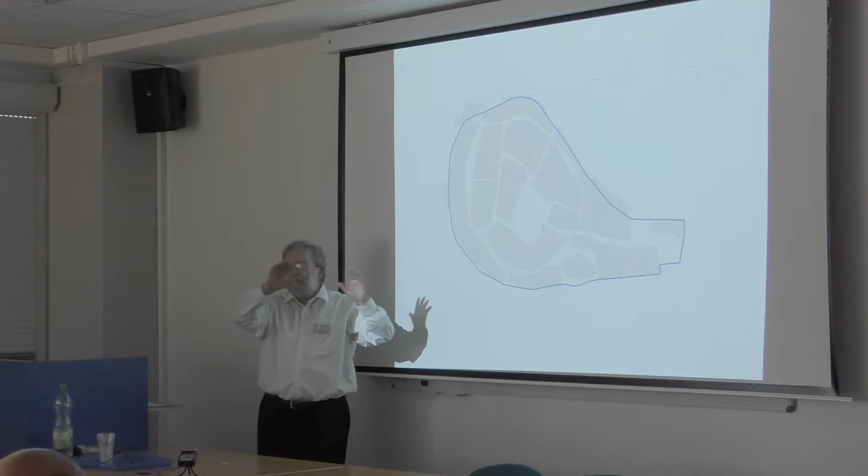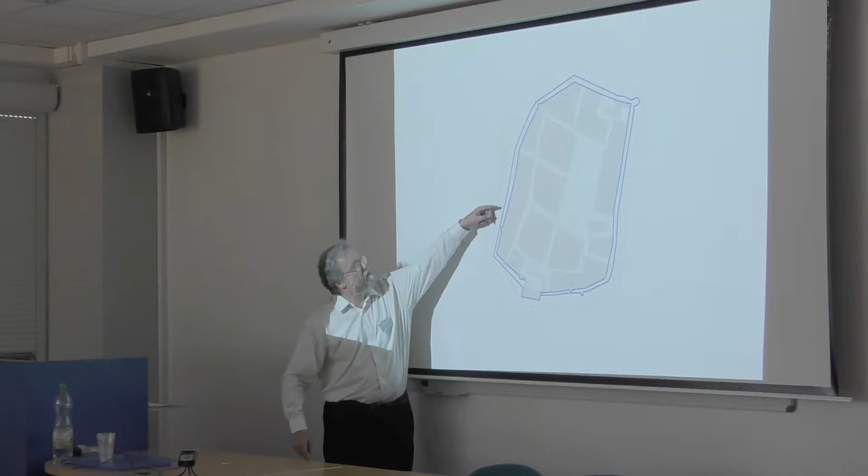We would like to show that in complex cities like Český Krumlov, we know that they were planned, of course they were planned, but the plan follows strict geometrical rules. That's what we would like to show. It's not evident when you see the map of Kadaň; it seemed totally random, totally organic, without any form. But if we look to the plan of Kadaň, we look to the walls, we see that we can find straight segments in the alignment of the walls. And this is for us very interesting.

So I spot out the straight segments. Now I measure the deviation angles from one segment to another, on digital maps. We measured 13 angles, and we see that 2 angles correspond to 7.5 degrees, 4 angles are multiples of 7.5 degrees, you see? 3 angles are multiples of 7.5 degrees plus 1/2, and 4 are multiples of 7.5 degrees plus 1/4 or 3/4.

So I show the full unit angles, half unit, and a fourth. So we mean that the wall was angulated, that the angles of deviation followed recurrent values, that we may consider the angle of 7.5 degrees as a unit; it is the division of 90 degrees by 12. Yes, it's mathematical, but it may be strange. I continue. And we mean that the angles of 1/2, 1/4, 3/4 are subunits of 7.5 degrees. So we say the angle of 7.5 degrees is a rule.

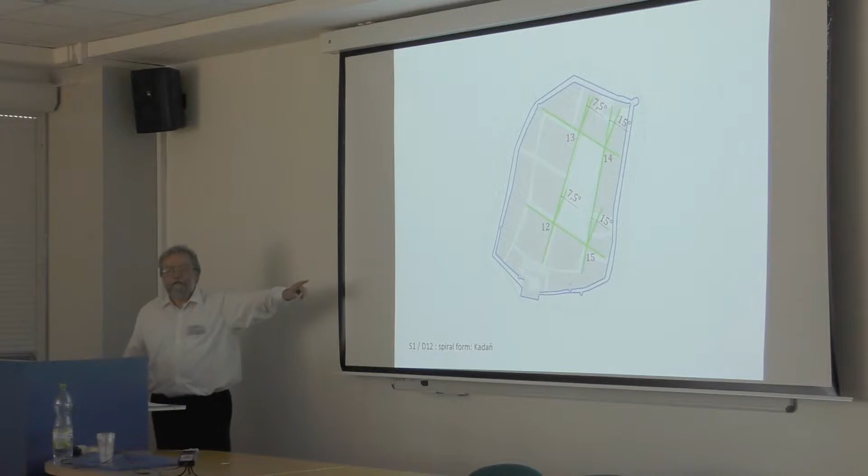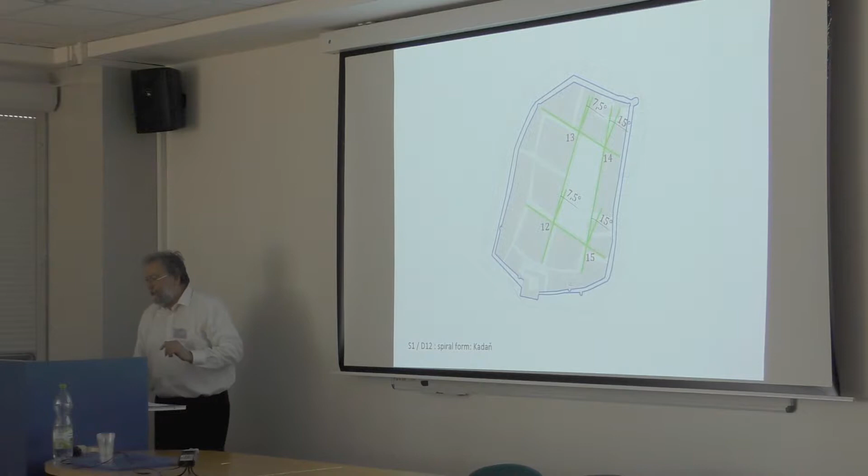And it's confirmed when we measure the angles of deviation of the marketplace alignments. Also 7.5 degrees or multiples of 7.5 degrees, and they follow the same orientations as the wall. So the angle unit of 7.5 degrees is a rule for us. We verified this type of rule in more than 50 cities in Czech Republic, in Slovakia and Austria, and we think that it works, that it's right.

So to consider the angle of 7.5 degrees as a rule is the basic hypothesis of our theory. The basic hypothesis. The use of topographic angles, of course, suggests triangulation, like land surveyors do today.

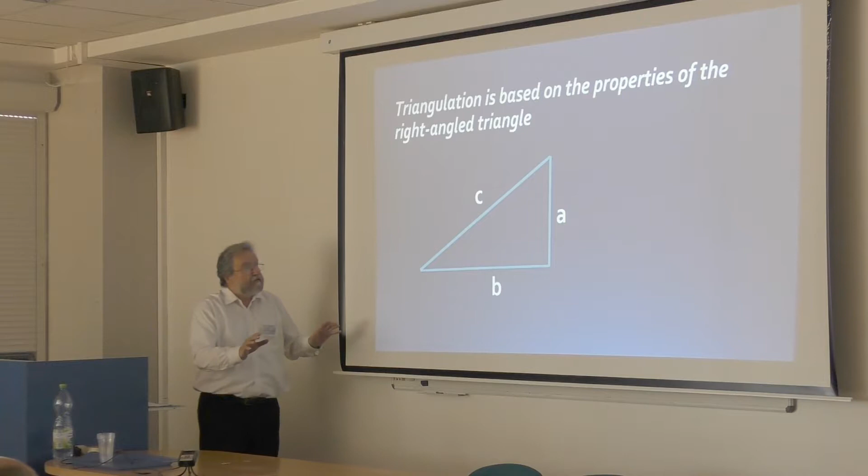Triangulation is a very old science, well mastered by Ptolemy in the 2nd century. He resolved fantastic trigonometric theorems. Myself, I have difficulties understanding them. But actually, it's based on very simple rules: the properties of a right-angled triangle.

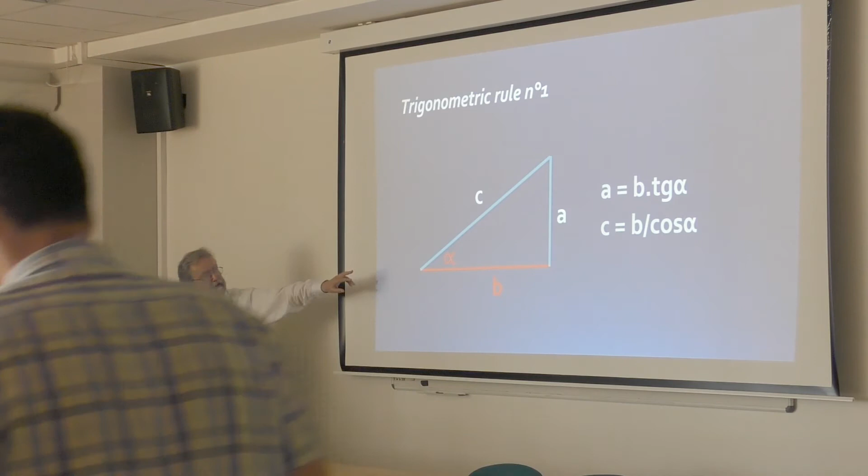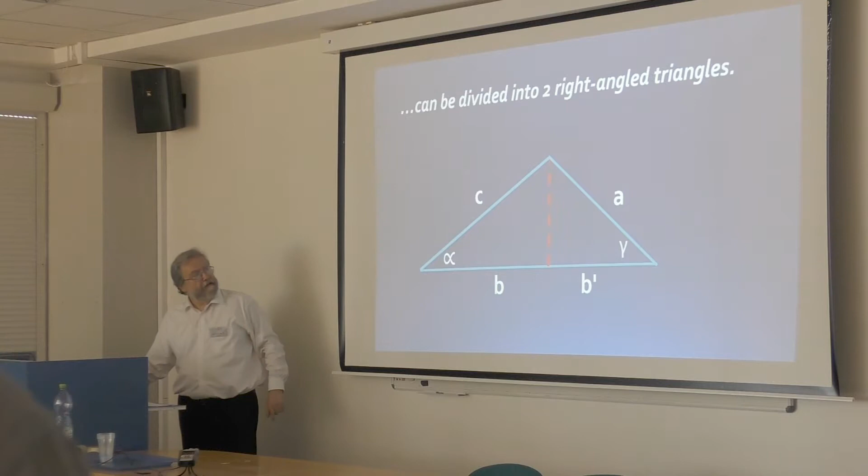It says if we know the length of one side and the value of one angle, we can calculate the two other sides. And each triangle, whatever it is, can be divided into two right-angled triangles. This is still in use today by land surveyors. But of course, land surveyors today use devices totally out of scope in the Middle Ages.

What we know about the Romans: the agrimensores used the groma. You can only make angles of 90 degrees or 45 degrees. Not interesting. We also know that the libratores, military surveyors, used the diopter, so you can measure angles of 1 degree, but we do not know how they used it, why they used it, what for. We have no description of the work of the libratores. We know that they existed and that they worked with a diopter.

In the Middle Ages, nothing. No remains of any device, no remains of any text. But it's not a reason to think that there was nothing. So we imagine triangulation in the Middle Ages based on a modified Roman groma that enables precise sightings, but only on angle multiples of 7.5 degrees. We built several prototypes with, I must say, excellent results, but the rule of only angles of 7.5 degrees.

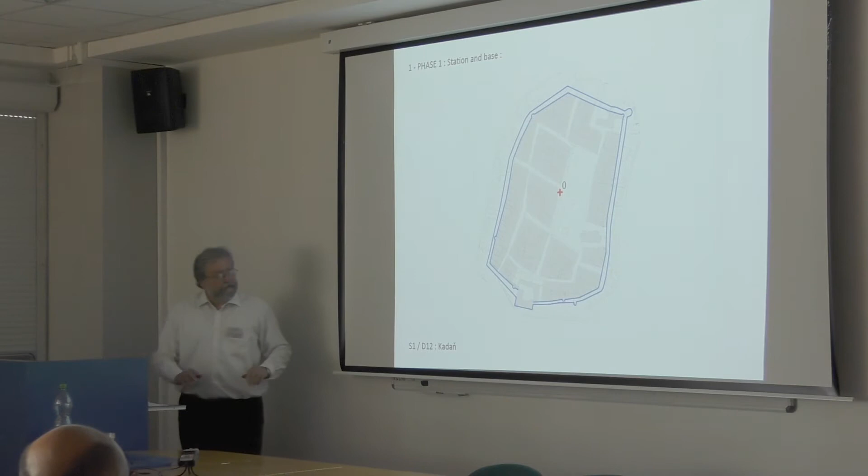Using that rule, we will now try to make a digital simulation of a potential triangulation of the city. See how it works. Back to Kadaň. To make a triangulation, we must start from a central point, the station. We found out that the station was probably set at the place where the tower of the town hall is now built. I don't say that they used that tower. No. The tower was most probably built on the place where the station was.

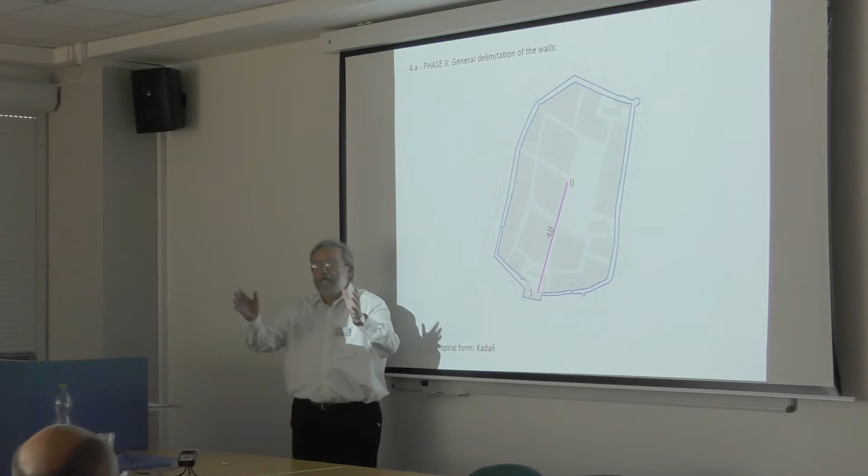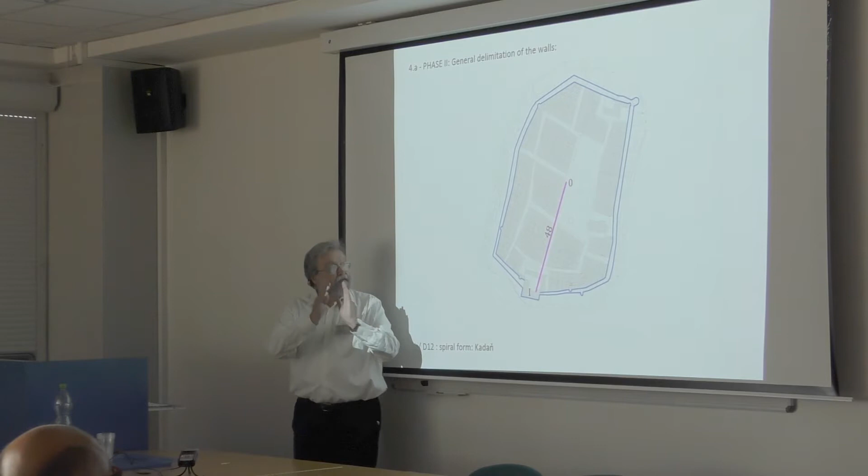Now, from the station, we measure a base. In Kadaň, we could see that the base was 48 rods. It's a unit of length. A rod is 16 feet. Exactly. Now, once we have the station, the base and one pole, we start a simulation of a triangulation. Now it's the computer that will tell me where the exact sightings on multiples of 7.5 degrees are.

I start. There are three possibilities. Okay, the middle clearly follows the wall. I start to make a triangle. It's not a good result. So we retry. Don't worry. We retry. This time, you see the sightings simulated by the arrows cross on the wall. So this is my second pole.

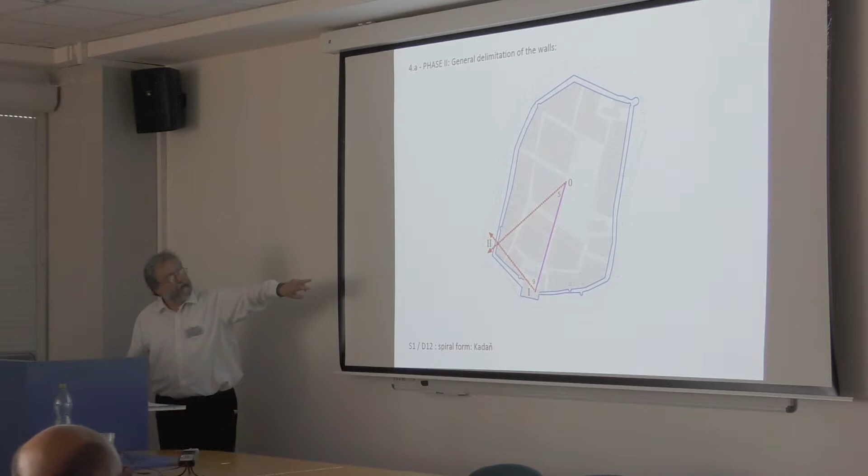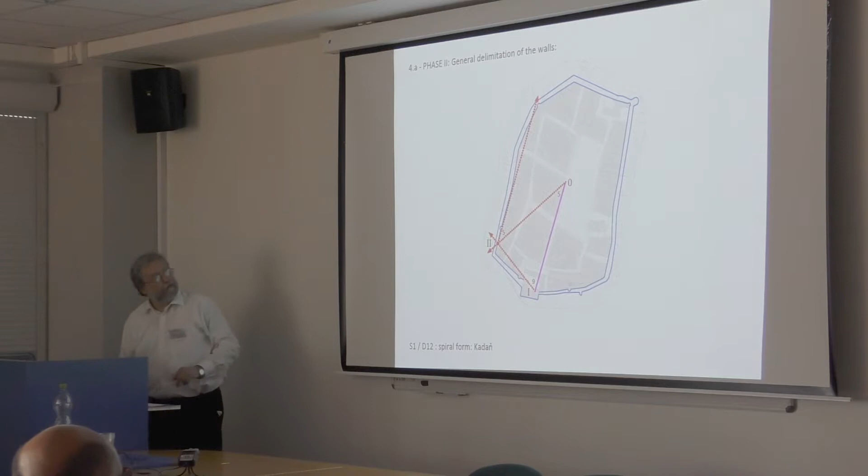From there, I make sightings to the north, and I see that I can follow the wall at a certain distance, and then I cross the wall again. From the station, make a new sighting, and tip top on the wall. Now I go in that direction to the corner of the city wall, and make a sighting from there. This is the computer. Now I continue. See, the arrows stay on the wall.

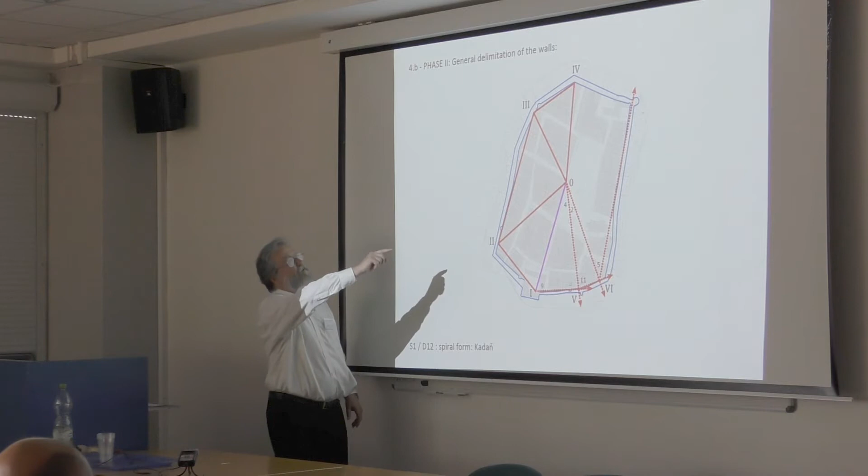Now it seems that's not really successful, but the next one, once again, I do not choose. I can choose which direction, which orientation I take, but not the precise position. And you see that after a number of sides, I am back on the wall. Go to the corner. Ah, big surprise, I'm just on the corner. From there, last sighting, and I close the loop. Now I have a web of triangles that I can calculate.

Now, the next question is, why should we triangulate a city? Well, we have here a web of triangles, not precisely on the wall, but very close to it. If we can triangulate, we can calculate the perimeter of the site, so we can evaluate the cost of the future walls. We can calculate the surface, and we can evaluate the income of the future city. Maybe these are interesting data for the authority who wants to found a new city.

And by the way, we use only 12 angles. With 12 angles, we can only create 6 different right-angle triangles. So the number of trigonometric values we need to know is very narrow. I don't say that they did it, I just say that they were able to do it.

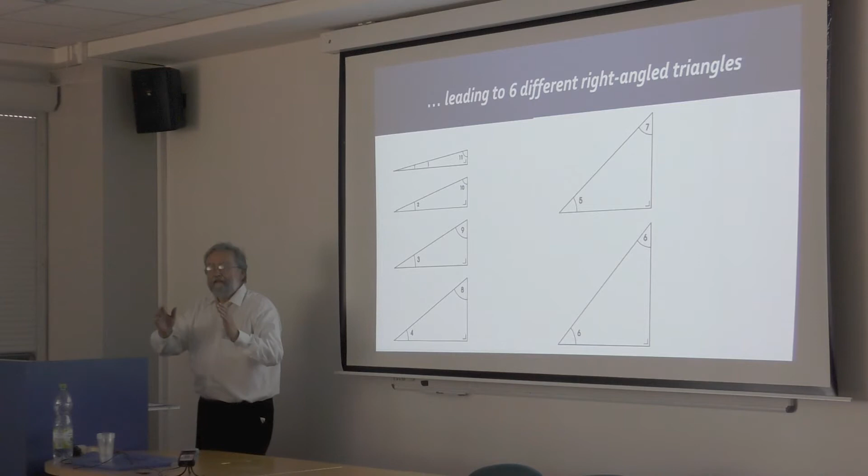Now we continue. The next step for the surveyor is to bring the wall to the best defense position, on the edge of the hill. Kadaň was built on a hill, and we try to bring the wall to the edge. So we cover our first sighting. From there, I can follow.

And from here, you see, we can no longer use sightings of a whole unit; we must use half of a unit. And this is the origin of the half unit. But in this case, no more calculation is needed. So I continue on that side with half units, and I have an excellent result. And there I reach the corner, just on the corner. From there, the sighting must be a fourth of a unit.

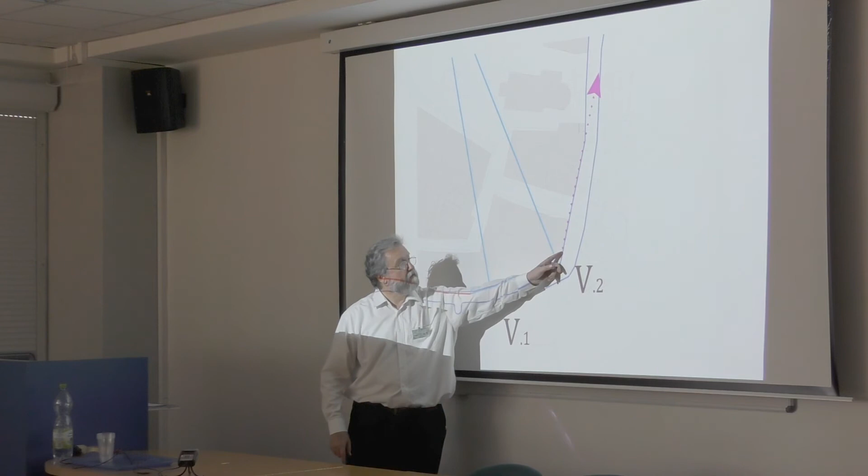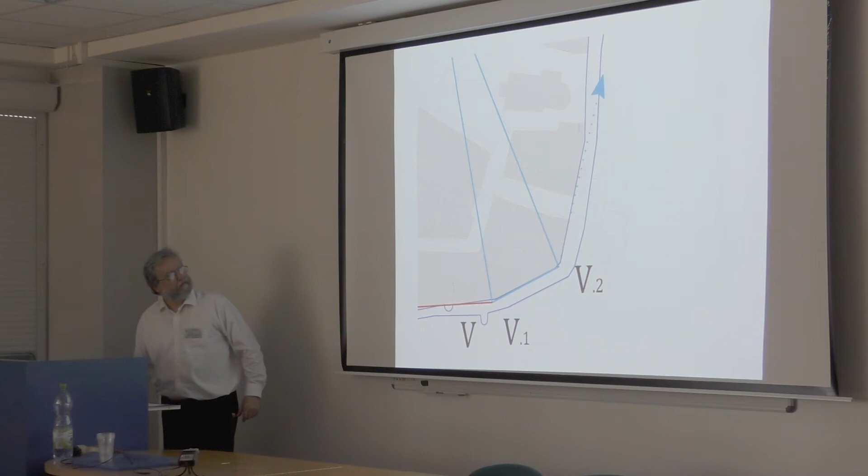Yes, look. I blow up. This is the position of the wall. And after 3 sightings, we are still on the wall. And if I show a full unit sighting, I'm there. Not right. And sorry, half unit, not right. I continue. Now I'm at the correct position of the wall.

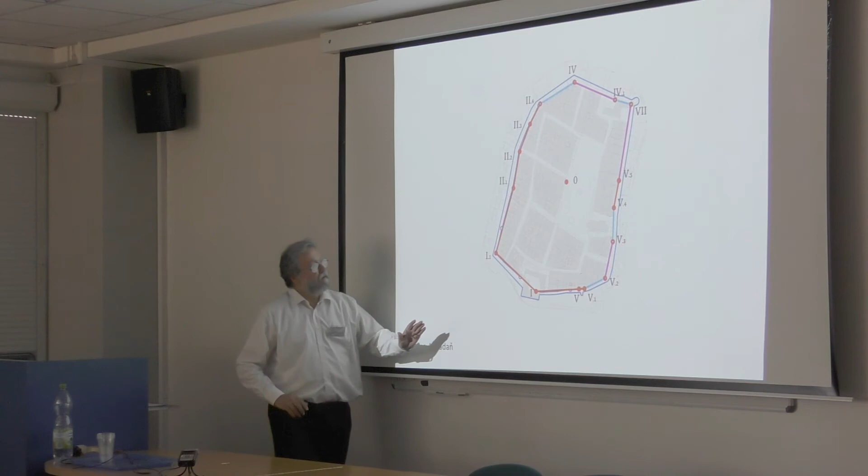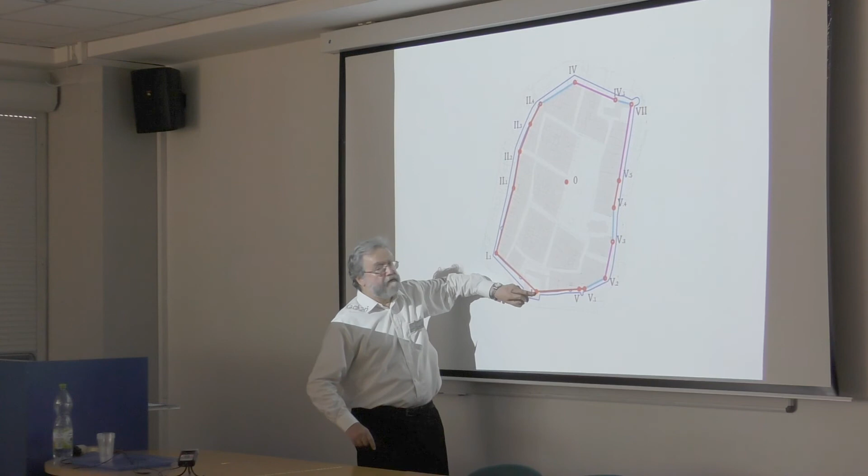Now, next step. We must define the position of the alignment. Now I apply a rule that we discovered. We make sightings from some of the poles we fixed now. I no longer fix the position of the poles. I just decide the position of the station, the length and the orientation of the base, and all the rest is given by the computer.

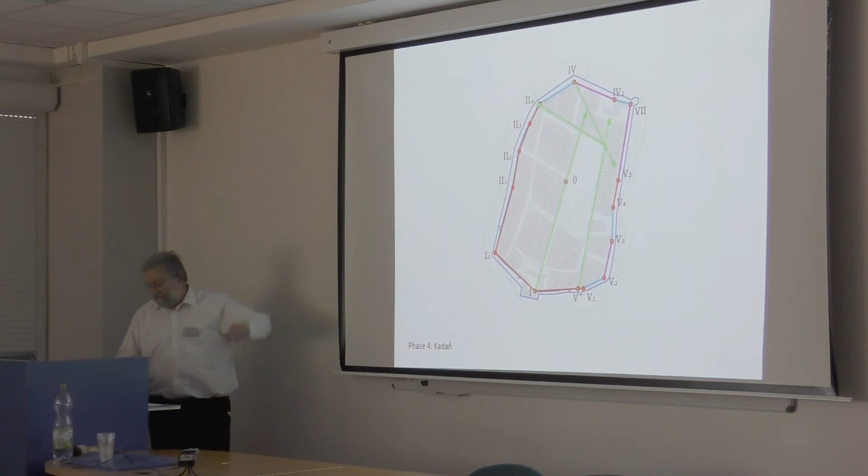Okay. I have the west side of the marketplace. Oh, sorry, I have the east side. Now I make a sighting from 4. I have the north corner, and I make a sighting there. I'm just on the alignment of the street, not exactly the alignment of the marketplace. And now you can say, yes, this is only chance. But this and this, a second time the same chance, well, I'm very surprised.